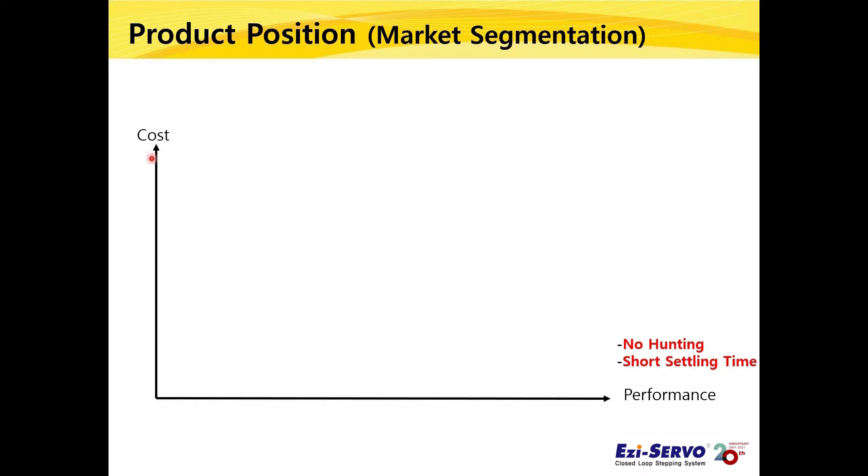This is the data only for the Korean market. The horizontal axis is performance, and the vertical axis is cost. Existing open-loop stepping motors were recognized as low cost and low performance, and the AC servo is a high-performance, high-cost motor. And the location of the closed-loop stepping motor was here.

It is a common perception of customers that it is better in performance than open-loop stepping motors and lower than AC servo motors. In this market, competitors' closed-loop stepping motors have dominated the Korean market for about 15 years at half the price of AC servos, with two advantages: no hunting, and shorter settling.

In addition to these two advantages, FASTECH moved the market from here to here with another advantage: high position accuracy, and achieved the number 1 market share in the Korean stepping motor market.

From now on, let's compare these three advantages: no hunting, short settling time, and positioning accuracy between Ezi-SERVO and AC servo with laser demonstration jigs.

The terms to compare are position accuracy and lost motion, related to position accuracy; comparison of settling time according to overshoot, related to short settling time; and robustness, related to no hunting.

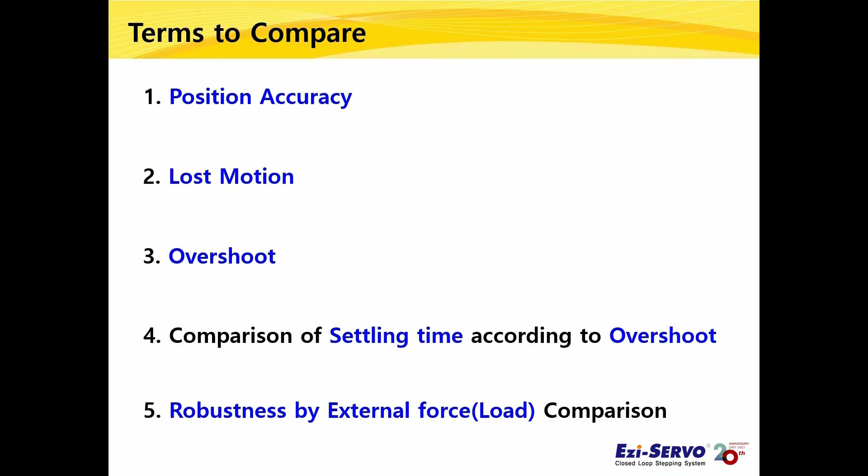We have prepared demonstration jigs to compare the two motors in these five aspects and see the difference in performance. First, let me explain the specifications of the demonstration.

As you can see, there is a demonstration in which you can visually observe the movement of the motor shaft by attaching a mirror to the motor shaft and reflecting the laser point on the screen.

The measurement conditions for both motors are the same. The size of the Ezi-SERVO motor is 42 mm, and the resolution of the installed encoder is 10,000 ppr. The capacity of the AC servo is 100 watt, and the resolution is also set to 10,000 ppr. The distance between the demonstration jig and the wall is 8.4 meters.

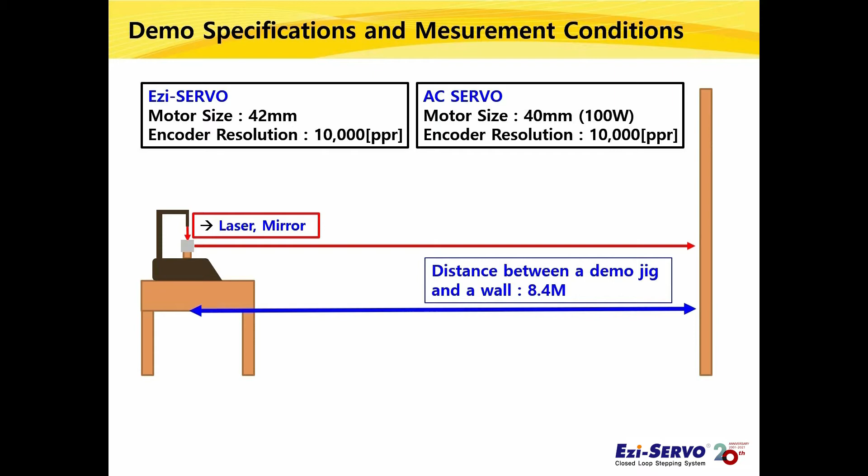First, let's compare the position accuracy of the two motors. As mentioned earlier, the measurement conditions for both motors are the same. Both motors were made to move at equal intervals by 0.36 degrees in only one direction. At this time, let's compare whether the actual position comes out the same.

As you can see, the AC servo has a constant moving distance at equal intervals, so it has high position accuracy without any position error. One thing to note is the Ezi-SERVO. Even though it is a stepping motor, you can see that it has the same high position accuracy as an AC servo.

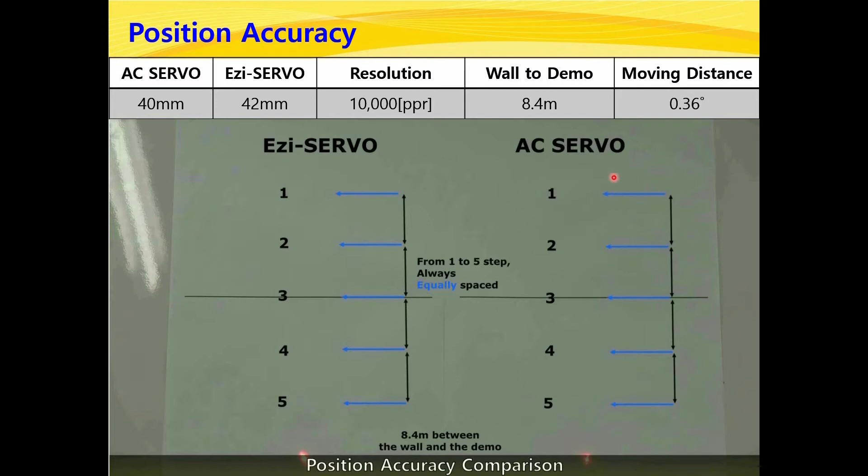Good position accuracy means that when it is moved in one direction, it does not show position error. Both AC servo and Ezi-SERVO show this. Next, let's compare the lost motion.

The measurement conditions were the same as before. The difference from position accuracy we saw earlier is that the motor rotates alternately in the CW and CCW directions by 360 degrees. That is, in the case of lost motion, the direction has to be changed.

As you can see, the AC servo rotates 360 degrees regardless of the direction, and it returns to the target position without any position error. Likewise, even if the direction of the Ezi-SERVO is changed, you can see that it returns to the target position without any position error. Lost motion refers to the position error that occurs when the direction changes.

In summary, position accuracy and lost motion are related only to the accuracy of the encoder. An Ezi-SERVO uses a high-precision encoder like AC servos, so it always checks the current actual position and corrects it so that there is no position error. Thus, Ezi-SERVO has high position accuracy and small lost motion.

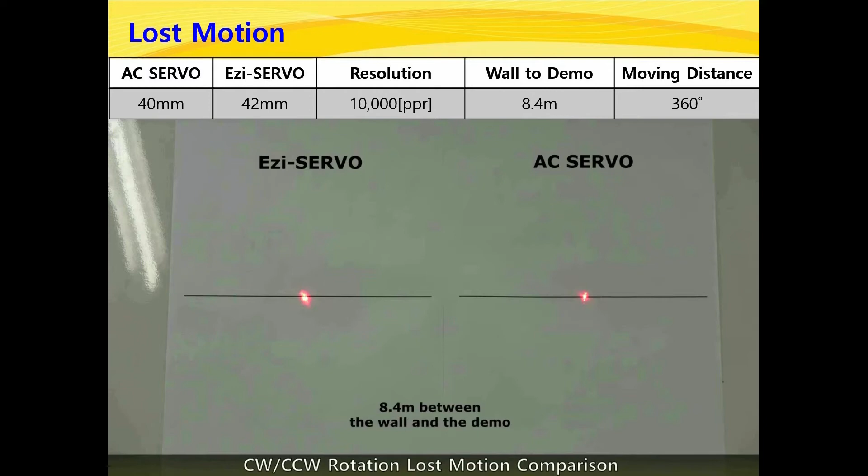Next, I will show you the overshoot. Overshoot means the value of how far the motor has exceeded the target position. The demonstration used the same setup as before. From now on, let's see how the overshoot differs when the motors are moved under these conditions.

As you can see, Ezi-SERVO has a small overshoot, but AC servo has a relatively large overshoot. Of course, the AC servo used in the demonstration is not optimal because it has been tuned with the auto-tuning function, and overshoot can be reduced if it goes through a precise tuning process. But even without such hassle, Ezi-SERVO can show its performance without overshoot.

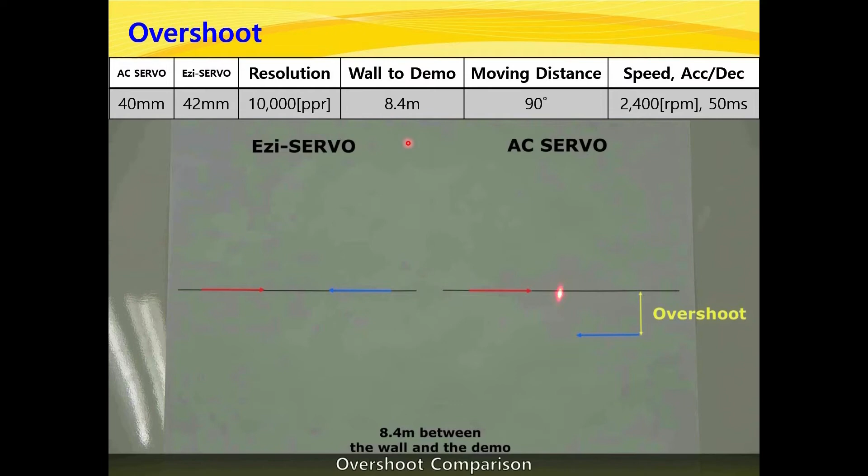This overshoot will affect the settling time. I will show the difference in settling time according to the overshoot in a video.

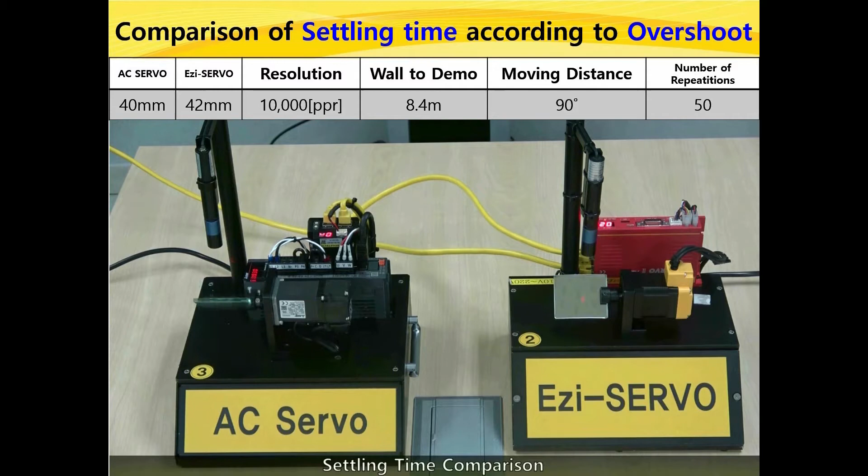We set the in-position value to 0, which is the condition that the next command is executed only when the commanded position is reached without an error of 1 pulse. The operation was repeated 50 times without waiting time between commands.

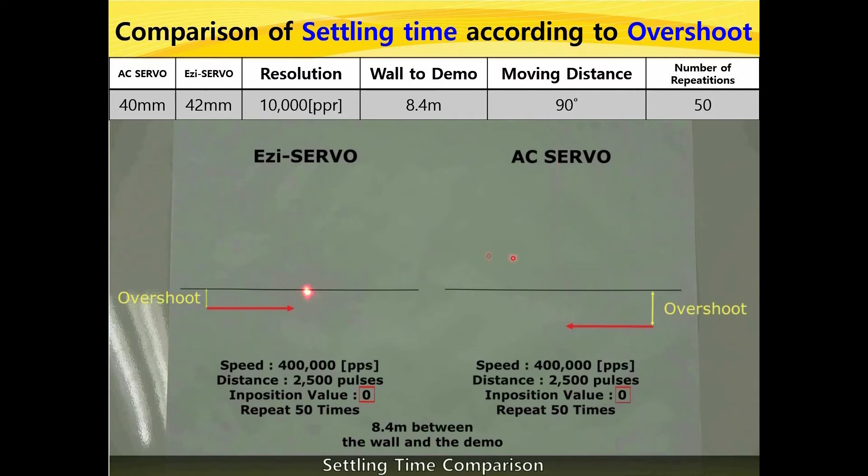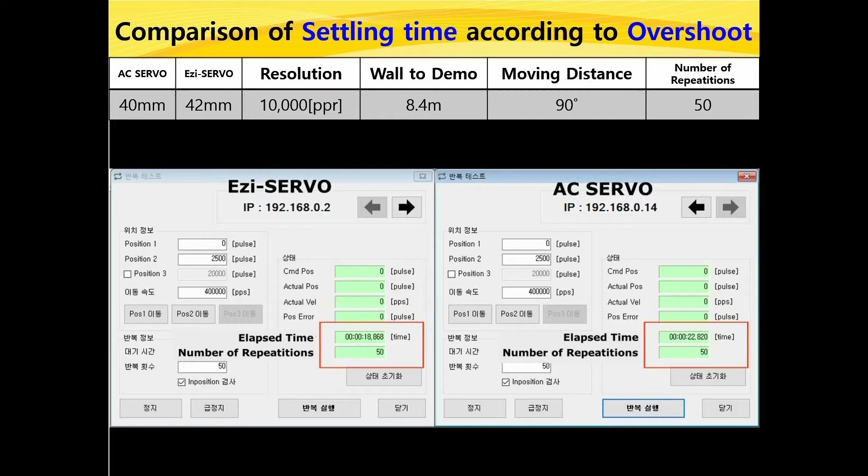As you can see, Ezi-SERVO with less overshoot completed 50 repetitions about 4 seconds before AC servo. If a larger overshoot occurs, more time is required to execute the next command. In other words, the takt time would increase. That is why short settling times are important.

Finally, let's compare robustness. Let me show you what happens when the same external force is applied to the mirror on both motors. Ezi-SERVO does not move much even when external force is applied, whereas AC servo shakes greatly, that is, hunting occurs.

This will be explained in more detail through a comparison of the torque characteristics of AC servo and Ezi-SERVO and a demonstration video later.

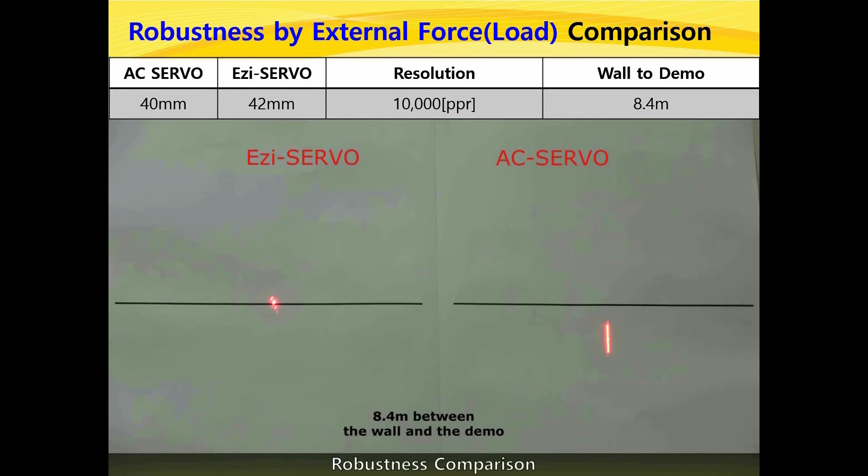Before that, I would like to ask you a question with a real machine as an example. This application is the XY theta vision alignment stage, one of the most common applications. Basically, alignment is a machine that allows the camera to accurately capture the object to be inspected by continuously moving a short distance.

In this machine, a 100-watt AC servo is mounted on the right, and an Ezi-SERVO of the same size is mounted on the left. Would AC servo be better for this application? Or would Ezi-SERVO be better?

Customers have taken it for granted to use AC servos in applications requiring high position accuracy. As mentioned earlier in the market segmentation, customers generally have a perception that AC servo performance is better than stepping motor. Of course, the correct answer is Ezi-SERVO. But the why is important. How can a stepping motor show better performance than an AC servo? We will explain it in the next chapter.

First, I will explain the difference between AC servo and stepping motor with torque comparison. Let's compare the torque of similar size AC servo motor and stepping motor. The graph shown above is the torque graph of a 200-watt AC servo motor, and the graph below is the torque graph of Ezi-SERVO of the same size as 56L.

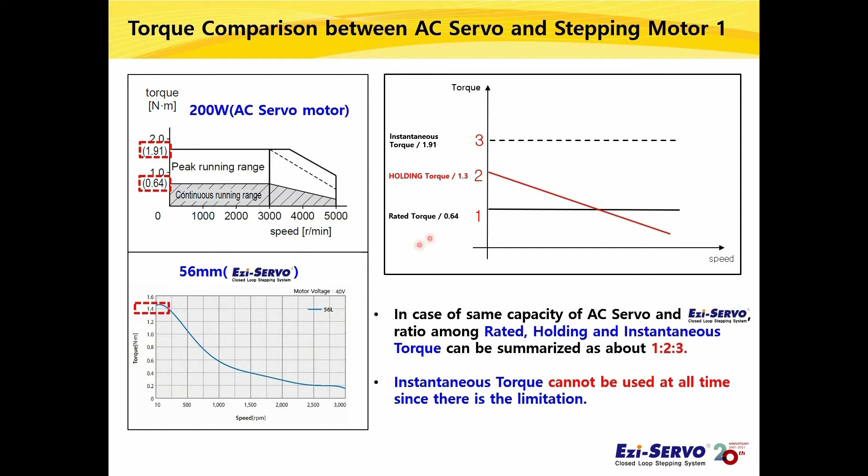Literally instantaneous, that is, it is this instantaneous torque that can be used only for a while during acceleration and deceleration. Also, even if an instantaneous torque of 3 can be used, when the speed is 0, that is, when it is at the target position, the stepping motor has a higher torque than the AC servo motor because of the holding torque of 2.

As previously explained, the instantaneous torque of 3 is not always used, but the torque of the AC servo motor is proportional to the position error. The smaller the position error, the smaller the torque, and the smallest torque at stop, that is, at the target position.

For example, as you saw in the robustness comparison video using the laser demonstration earlier, when a small mirror is attached to the motor shaft and touched by hand, the torque generated by the AC servo motor is very small because the positional error is small. Therefore, it is easy to rotate the mirror by hand at first, but as the mirror is rotated more and more, the positional error becomes larger and the AC servo supplies more current to the drive to reduce this position error. Thus, it becomes difficult to rotate the mirror.

In other words, the torque of the AC servo motor is not always an instantaneous torque of 3, but is proportional to the position error and produces the smallest torque when it is at the target position. So there is a high possibility of hunting after stopping.

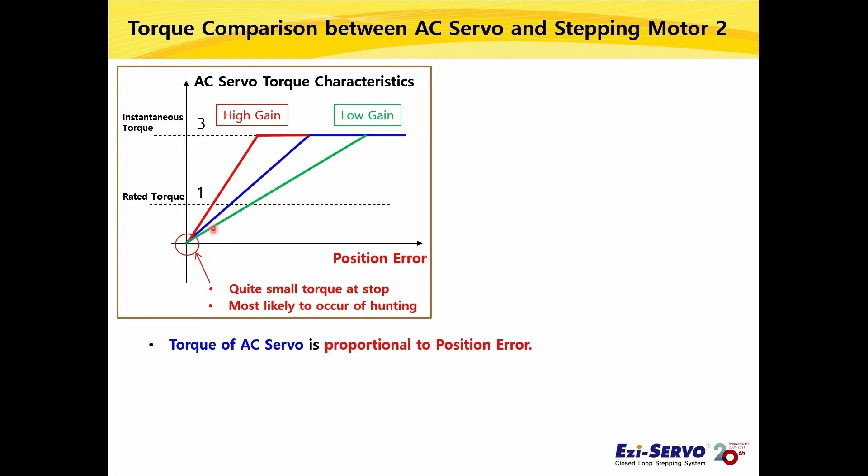Of course, if the gain is adjusted for the AC servo, the response improves. But when it is near the target position, the torque is the same regardless of the gain. On the other hand, since the torque of the stepping motor is not proportional to the position error, it is only related to the speed, and has a holding torque that produces the maximum torque when stopped. The possibility of hunting after stop is smaller than that of the AC servo motor.

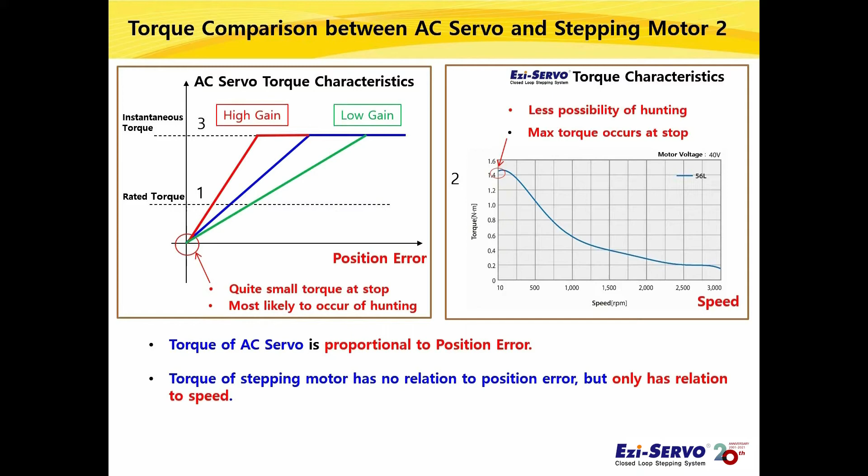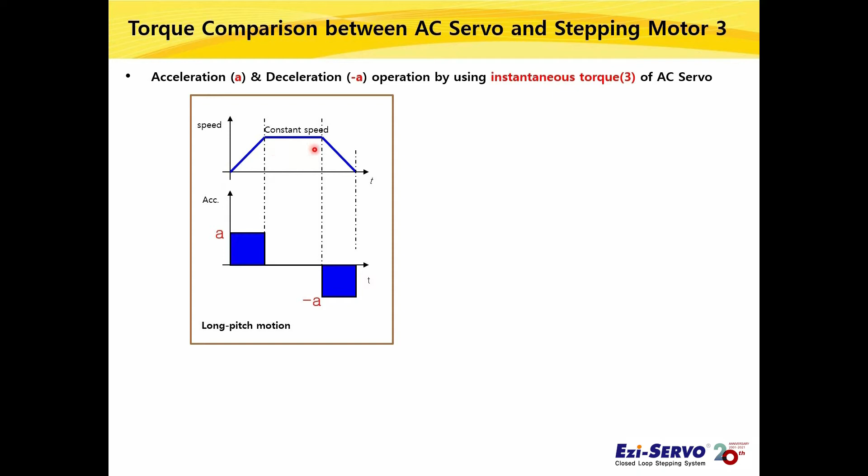Now let's divide the motion into two and compare it. One is a long pitch motion, in which there is a constant velocity section, and the other is a short pitch motion that decelerates immediately after acceleration.

Now, let's assume that a certain load is accelerated and decelerated by A, using the instantaneous torque of 3 of the AC servo motor. Assuming that F equals ma, m, the load, is a fixed value. First, in the case of a long pitch motion, acceleration is a when accelerating. Since there is no change in speed in the constant speed section, the acceleration of the load is 0. And the acceleration when decelerating is minus a. Therefore, the absolute value of acceleration-deceleration applied to the load, that is, the impulse, F, is a.

On the other hand, in the case of short pitch motion, this constant velocity section does not exist, and deceleration is performed immediately after acceleration. In other words, since acceleration and deceleration change continuously, the amount of impulse applied to the load is 2a.

To make it easier to understand, for example, if you use an instantaneous torque of 3 like an AC servo motor, you can understand that the shock transmitted to the vehicle body is doubled if you press the accelerator and brake continuously. Therefore, in short pitch motion, instantaneous torque of 3, that is, maximum torque of the AC servo motor, cannot be used. This is because if used, it is more likely to cause shock or vibration to the mechanical system, such as a car as an example.

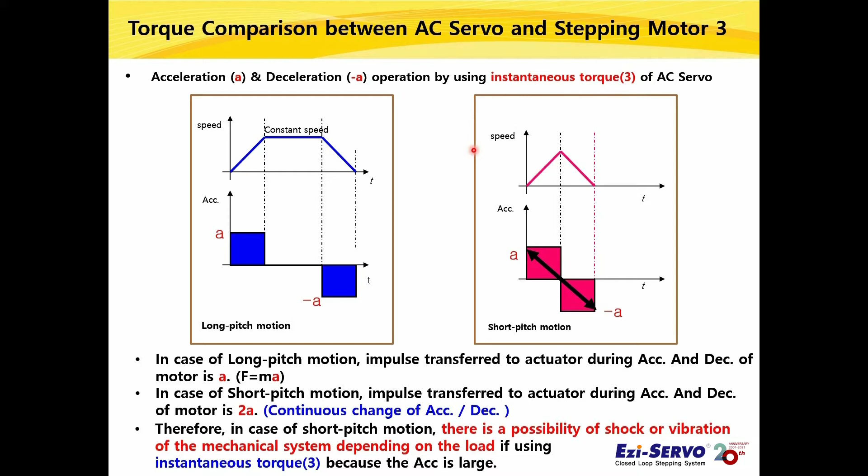Back to the beginning, I will ask again. In short pitch motion applications that move short distances at high speed, such as the XY-theta alignment stage, when it is stopped at the target position and shock or vibration comes from outside, which motor, AC servo or stepping motor, is likely to hunt?

It's an AC servo. As mentioned earlier, if you use the instantaneous torque of 3 of the AC servo, it can give a shock to the mechanical system when aligning. Also, when aligning, the distance is very short, so it is often difficult to use an instantaneous torque of 3.

First of all, as you saw in the video comparing the robustness of the laser demonstration, the AC servo generates the smallest torque when at the target position, that is, when the speed is 0, so there is a high possibility of hunting after stopping.

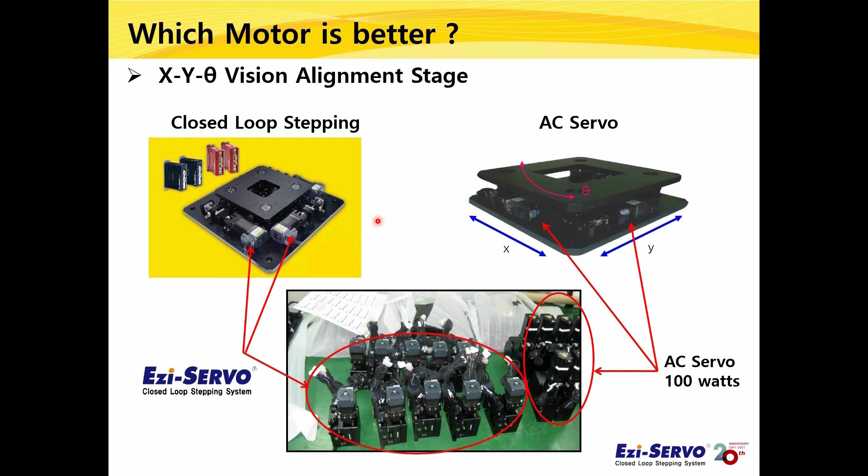However, in the case of a stepping motor, there is a holding torque that exerts the greatest torque at the target position, so when the alignment is over, it stops at the target position and holds the stage tightly with the holding torque. This is a demonstration of the difference between AC servo and Ezi-SERVO in high-speed short-pitch motion, described so far.

The same actuator with the belt structure is equipped with a 42 mm size Ezi-SERVO on the left, and a 100-watt class AC servo on the right. There are cameras on each side, and there is a piece of paper with a small word on it, as the camera moves by motor continuously over a short distance, capturing the written text. You can think of it as the same as a vision factor.

As you can see, the Ezi-SERVO has a high holding torque and less hunting when stopped, so the text is captured by the camera even in a short pitch motion.

Since the AC servo generates the minimum torque when stopped, hunting occurs, and you can see that AC servo cannot capture a text in a short pitch motion. However, the text is captured only when you move the beginning and end, that is, a long pitch.

To explain more about the belt pulley system, due to the mechanism structure, the belt pulley is a short pitch motion from the motor shaft perspective. For example, in the case of a ball screw, when the lead is 10 mm, the motor moves only 10 mm in one turn, but in the case of the belt pulley, when the radius is 10 mm, when the motor turns once, the belt moves 62.8 mm as you can see.

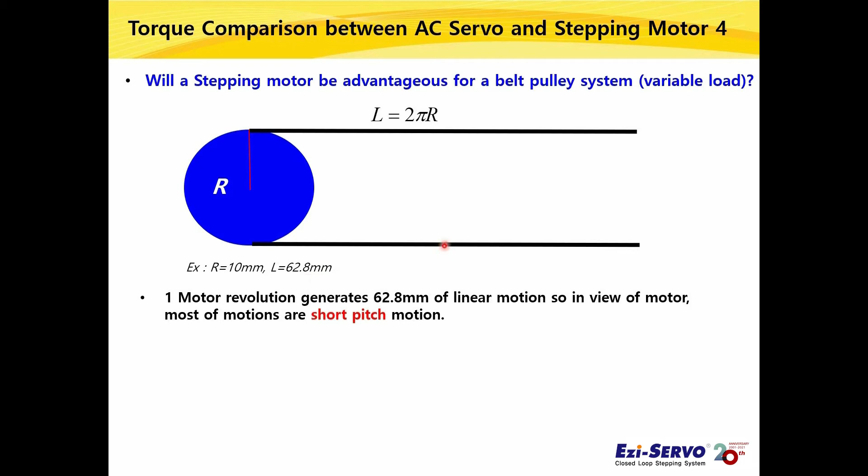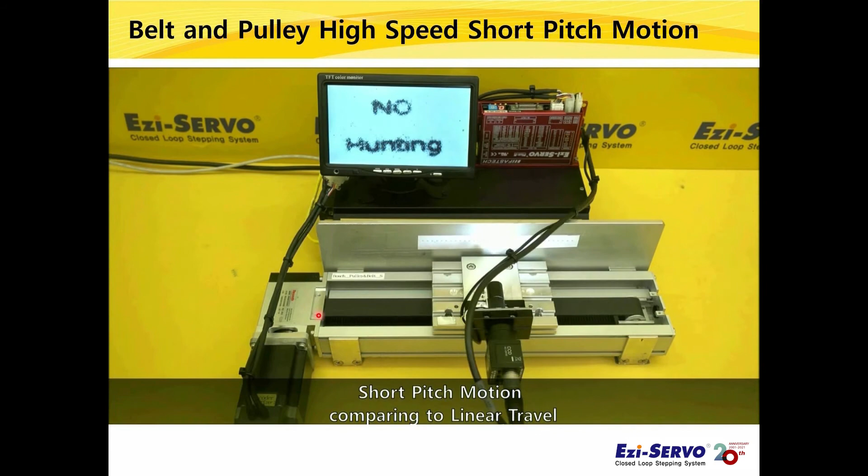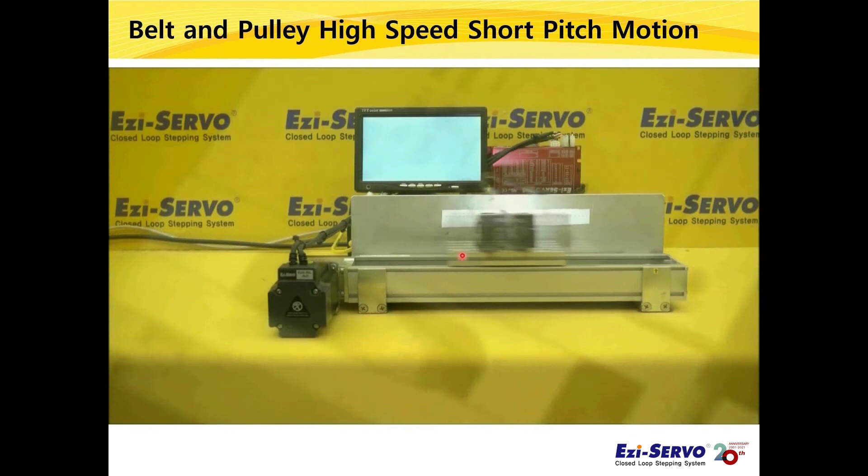I will show you a demonstration of the belt pulley in action. If you look at this part, you can see the short pitch motion of the motor in the belt pulley demonstration. You can see that the word 'no hunting' is accurately captured without hunting even in a short pitch motion.

In summary, in the case of an AC servo, the position error decreases when decelerating from the target position, and the motor torque decreases when the position error decreases. Near the target position, the torque generated by the AC servo is very small, and the belt is of low rigidity, so when the belt is shaking, the force is transmitted directly to the motor shaft, so it continuously affects the shaft.

On the other hand, in the case of a stepping motor, as the speed decreases, the stepping motor increases the torque and produces a maximum torque near the speed zero, near the target position. So, in the case of AC servo, since the torque is small near the target position, it is difficult to stop without hunting because the vibration caused by the tension of the belt is directly transmitted to the motor shaft.

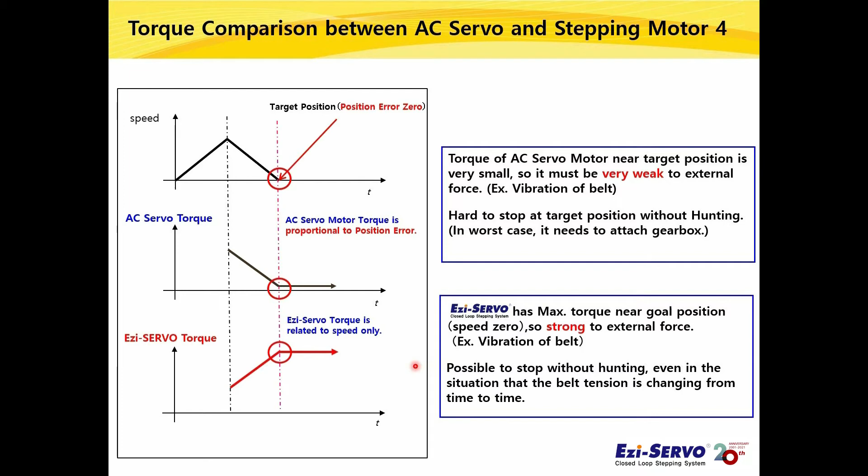The stepping motor can overcome the vibration and stop without hunting without a gearbox, because the torque generated by the stepping motor at that time is relatively larger than that of the AC servo, even when the vibration caused by the belt tension is transmitted.

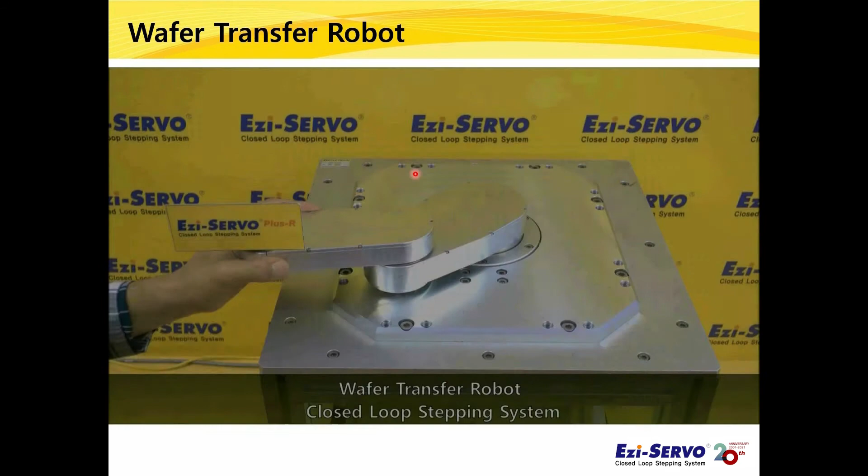I'll use a video of the wafer transfer robot as an example. As you can see, the WTR has a belt pulley structure inside. In the case of belt drive, the moving distance is long, so many people think that it is a long pitch motion that moves a large distance from a motor standpoint.

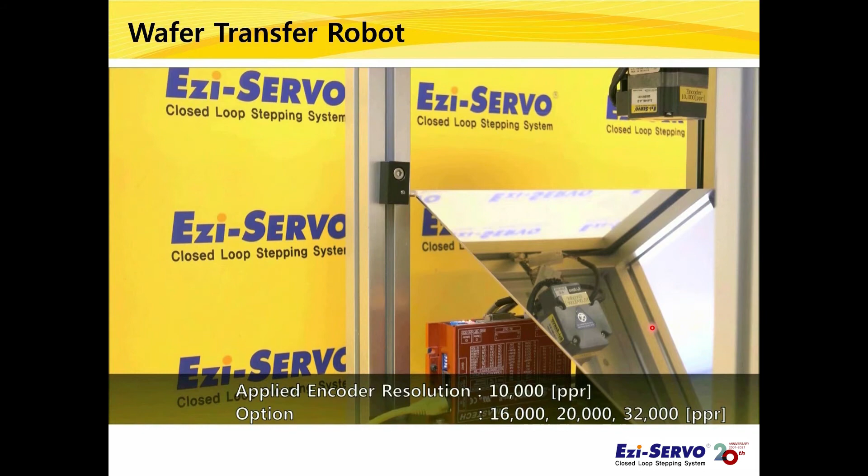However, from the motor standpoint, it is a short pitch motion due to its mechanical structure. As you can see, the distance the object moves seems to be long, but the motor does not turn even a single turn. This is an example showing that a stepping motor can be applied to such a WTR.

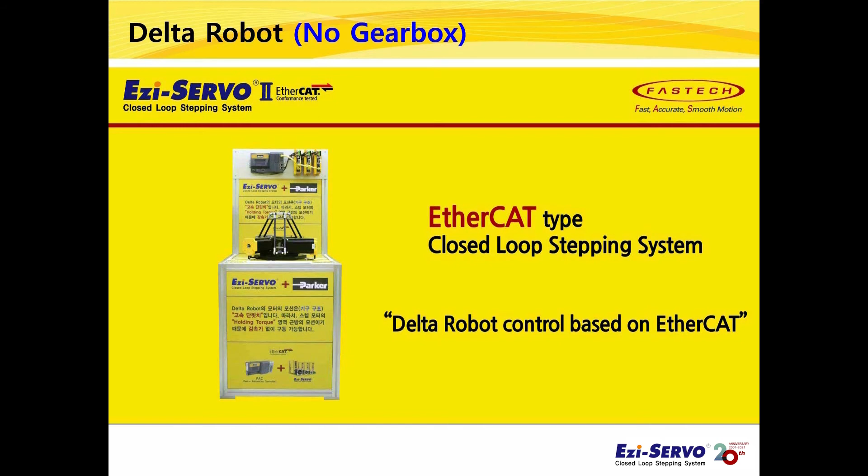The next video is about delta robot. In general, AC servo motors are used a lot for delta robots. However, when an AC servo motor is used, the torque at stop is small, so most of the motors are driven by installing a gearbox.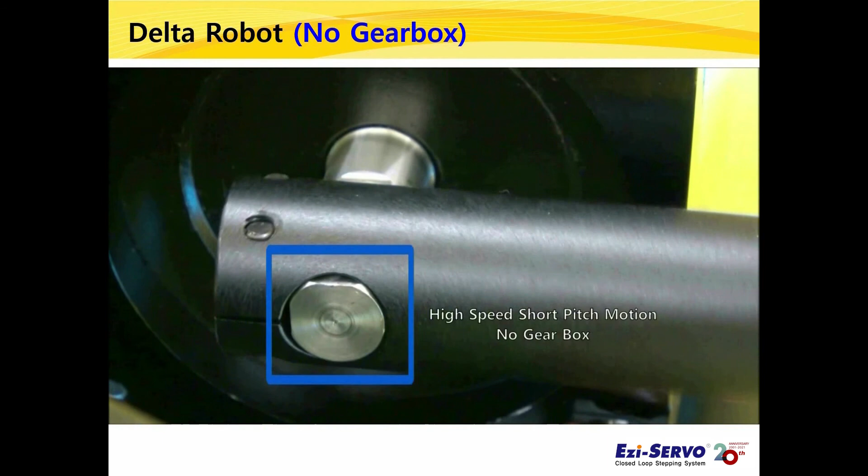In the case of stepping motors, the robot can be connected directly to the motor shaft without a gearbox because it generates the maximum force when stopped. If you look at the actual motor drive, it is a short pitch motion. It is a good example that a stepping motor can be applied because it repeats stopping and driving.

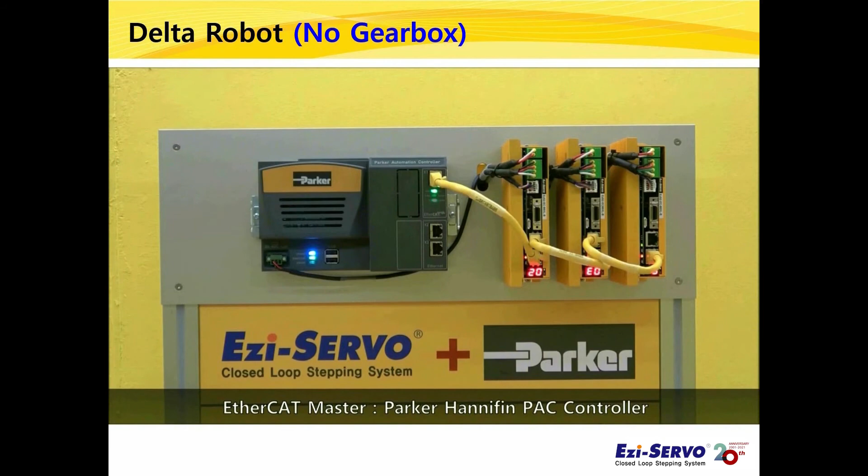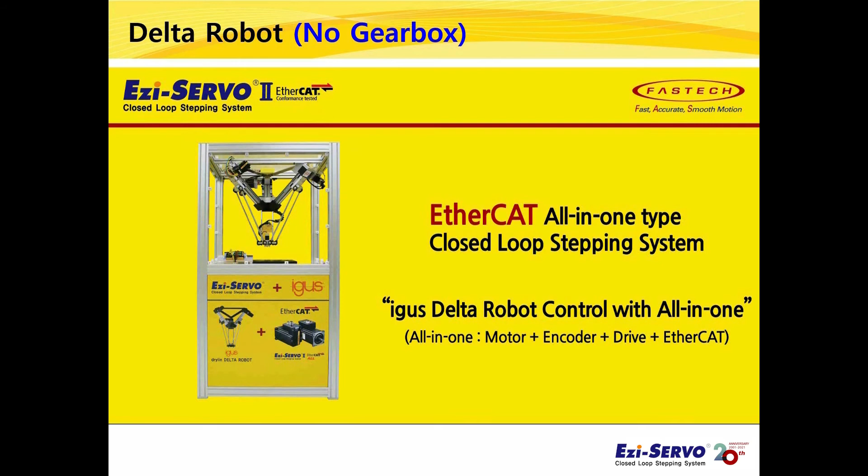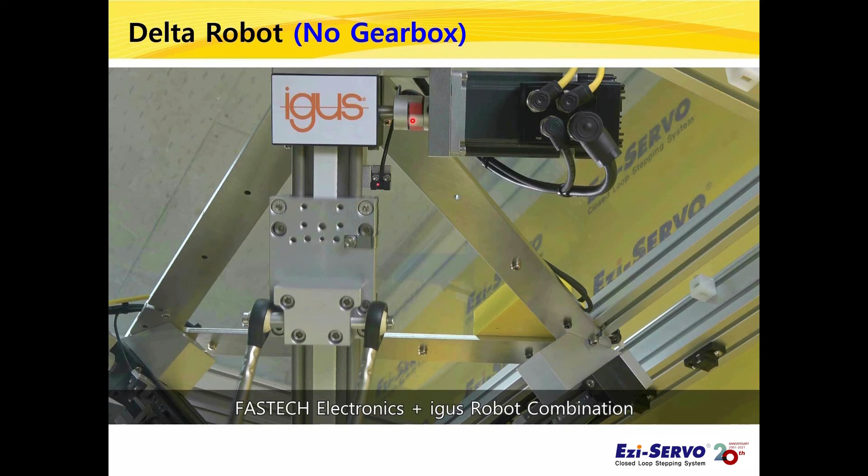This is a demonstration of a Delta robot from igus, Germany. This Delta robot has a belt pulley structure and is a short pitch motion from the perspective of the motor shaft due to its structure. You can see that the motor does not rotate 180 degrees. The stepping motor does not need a gearbox because it operates in a low speed range with short pitch motion. If you use an AC servo here, you may need to attach a gearbox when stopping.

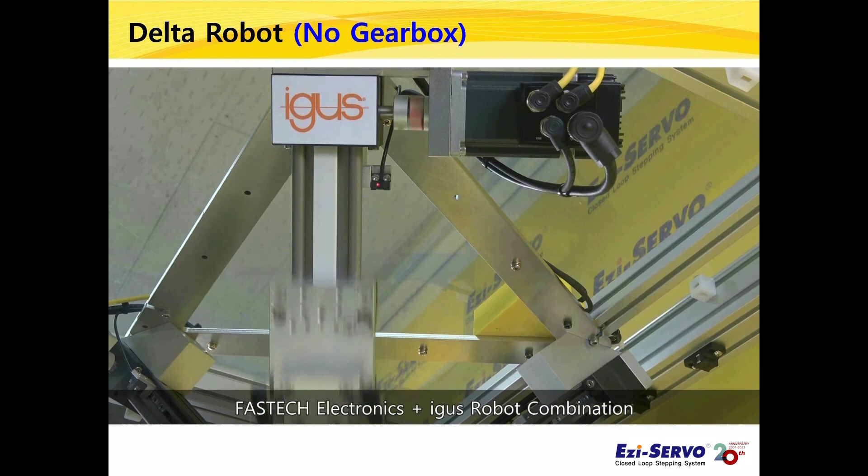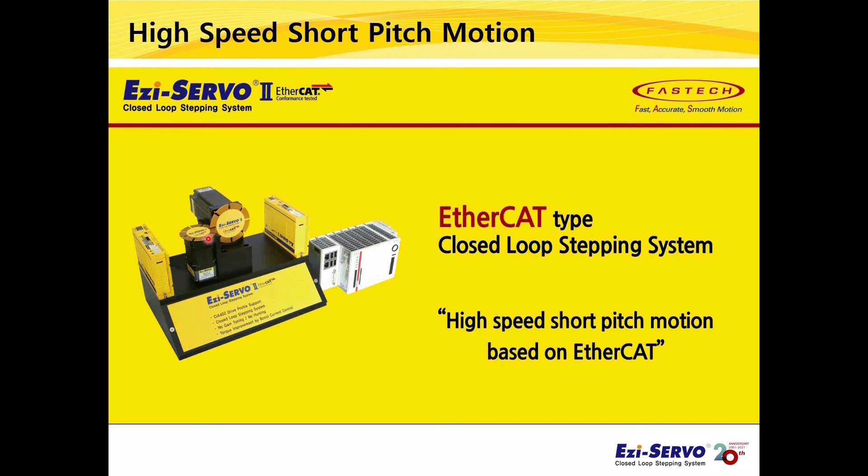The following is a demonstration showing a high-speed short-pitch motion using two motors. A disc with 8 small grooves was attached to the two motor shafts, and the grooves were vertically engaged. You can see the grooves interlock without collision while the two motors alternately drive in high-speed short-pitch motion. This operation is possible because of the precise position control through the high-resolution encoder of the Ezi-SERVO and the characteristics of the stepping motor without hunting after stopping.

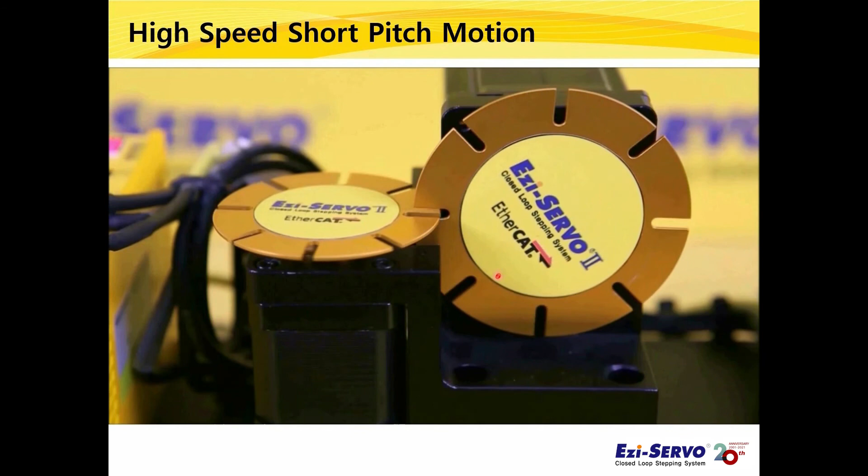Let's summarize what we have looked at so far. FASTECH Ezi-SERVO has 3 advantages by adding high positioning accuracy to the two factors that allow it to reduce the settling time. Due to the high holding torque characteristic of the stepping motor, there is no tremor or hunting after stopping, and there is less overshoot than the AC servo.

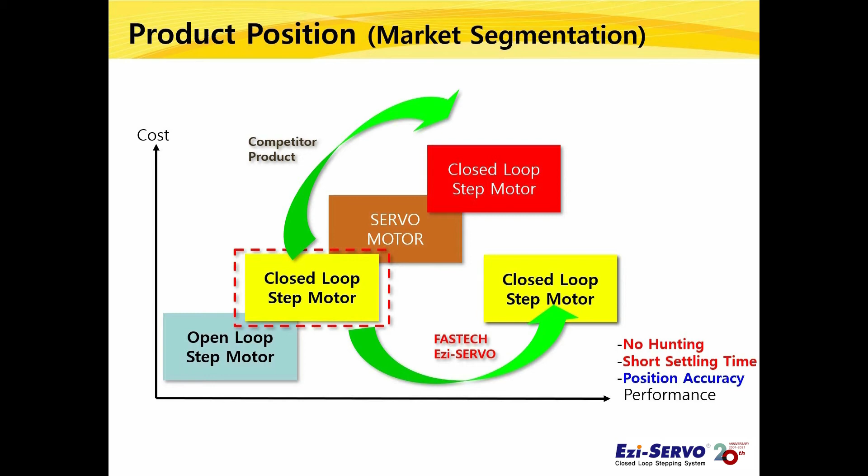In the Korean market, it was possible for FASTECH to move the closed-loop stepping motor market from here to here. It also replaced the AC servo market, especially 100-watt and 200-watt class AC servos. It wasn't easy, because customers' perception of AC servos and stepping motors was so strong. However, after the customer felt or actually experienced the advantage of Ezi-SERVO, it was possible to replace it, and now many customers use Ezi-SERVO.

From now on, I will introduce the actual application example of Ezi-SERVO.

Prior to introducing application examples, the main factors that could be applied to Ezi-SERVO are as follows: position accuracy, lost motion, overshoot and robustness. High position accuracy, low lost motion, small overshoot and robustness, as in stopping at the target position without hunting after stopping. Based on these 4 factors, I will introduce how Ezi-SERVO could be applied to each application by replacing AC servo.

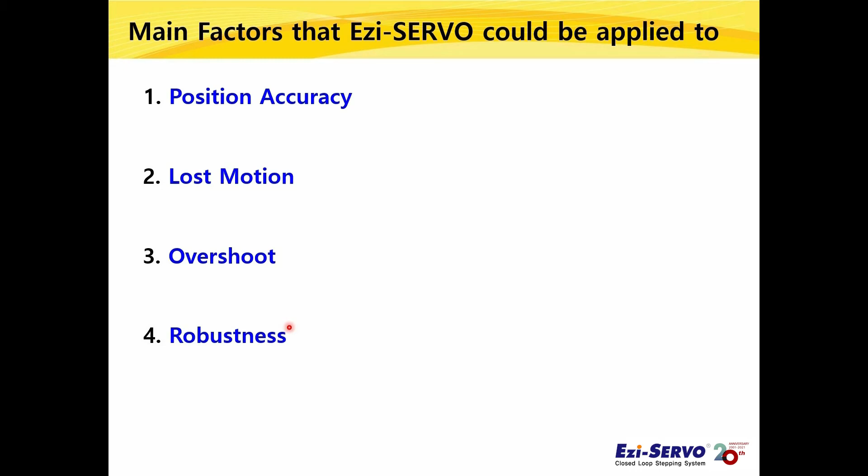The following is the LC dispensing machine. LC means liquid crystal. Two glasses are needed to make LCD panels used for TVs and monitors: the TFT panel on the left, and the color filter on the right. A certain amount of liquid crystal is dropped on the TFT panel as shown in the picture.

Glue is applied to the color filter as shown in the picture. Then, the part where the liquid crystal is dropped on this panel is bonded to the color filter on the right. When bonded together, this is the TFT part, this is the color filter part, this is the glue, and this red part is the liquid crystal.

When it is bonded, this liquid crystal spreads quickly. For example, when you press the panel with your hand on the TV, that is, when you press the liquid crystal, the pressed part changes color. The reason the color changes is that the liquid crystal is liquid, so when pressed, it escapes to the other side and the amount of liquid crystal changes in the pressed part, causing the color to change. For this liquid crystal volume to be constant, the drop must be constant.

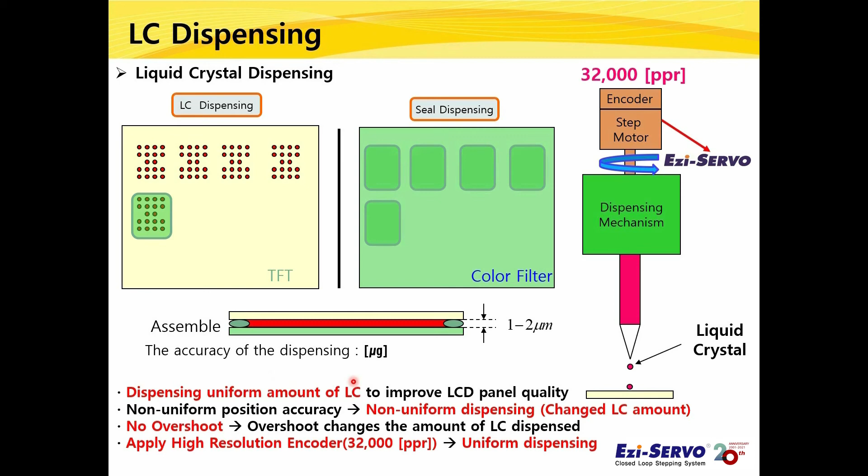But because of the customer's general perception that a stepping motor could not be used where an AC servo was needed, it took a year to suggest and conduct a test for replacing the AC servo with Ezi-SERVO. This is the actual liquid crystal dispensing machine. It took a year to get the opportunity to test the Ezi-SERVO, but after the engineers actually tested it, the AC servo on the entire machine could be replaced with Ezi-SERVO at once.

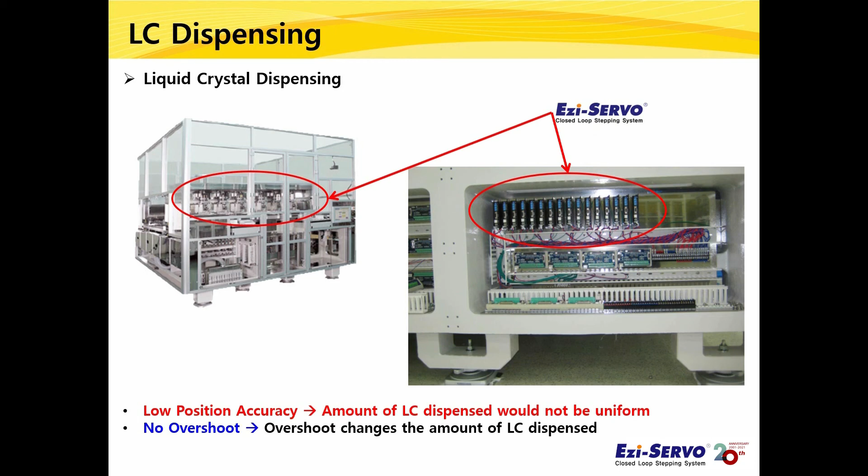I explained earlier that the glue must be applied to the color filter regularly. In this case, it is necessary to use a laser sensor to control the gap between the panel and the dispensing nozzle to be constant. This machine shown in the picture controls the gap between the nozzle and the panel through a laser sensor.

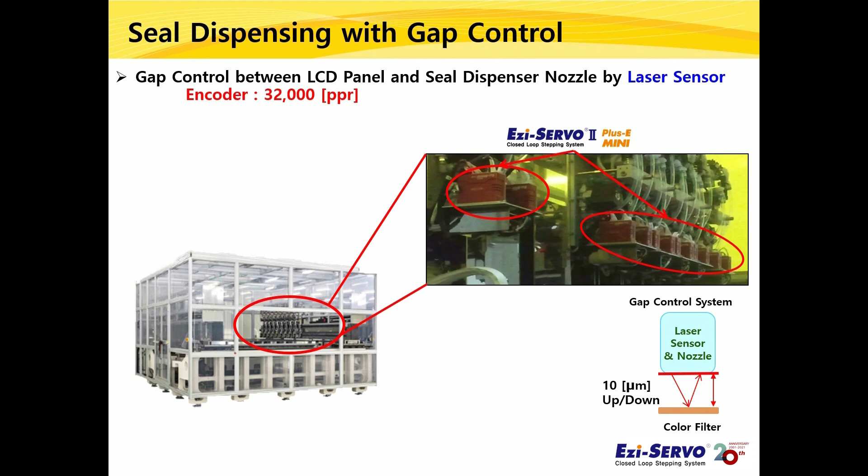In order to dispense a certain amount, the distance between the color filter and the nozzle must always be constant. In other words, gap control to keep the distance between the nozzle and the panel constant is necessary, so an expensive laser sensor is applied to this part. The color filter looks flat on the surface, but is curved. The nozzle must maintain the height against the bent color filter, and apply the glue following the gap.

That gap is 50 microns. For example, if the distance between the nozzle and the panel is 100 microns apart, you have to move 50 microns at a time.

If this spacing is not constant, such as 50 microns, if the distance is far apart, the glue will be less applied, or it will be more applied if applied closer. This means that the distance between the nozzle and the panel is always constant in order to apply this glue evenly.

For example, if your goal is to keep a gap of 50 microns, if the nozzle is 60 microns away, you'll have to order 10 microns down. When commanded like this, the Ezi-SERVO goes exactly 10 microns. Also, if you are 40 microns apart, you need to change the direction of the motor because you have to go up 10 microns. Even at this time, the Ezi-SERVO moves up to exactly 10 microns.

In the case of AC servos, position accuracy and lost motion are good, but the possibility of overshoot is high. So if an overshoot occurs and the motor moves too much, the glue may not be applied evenly. There is even a risk of damaging expensive panels by contacting the nozzles and panels.

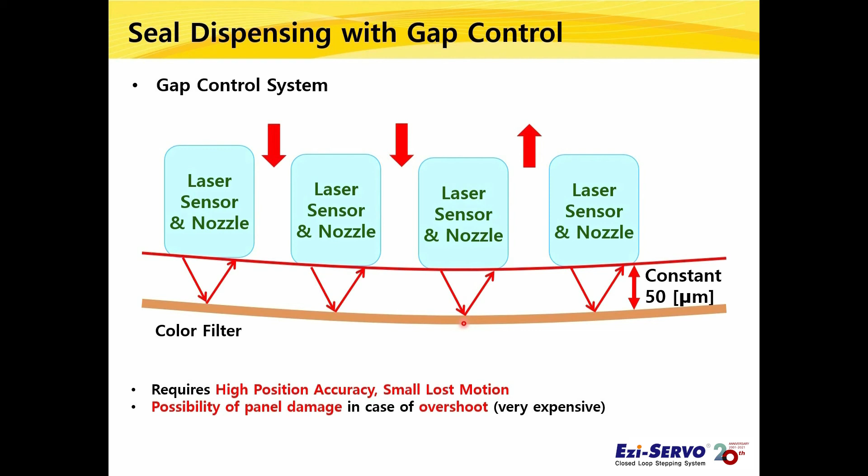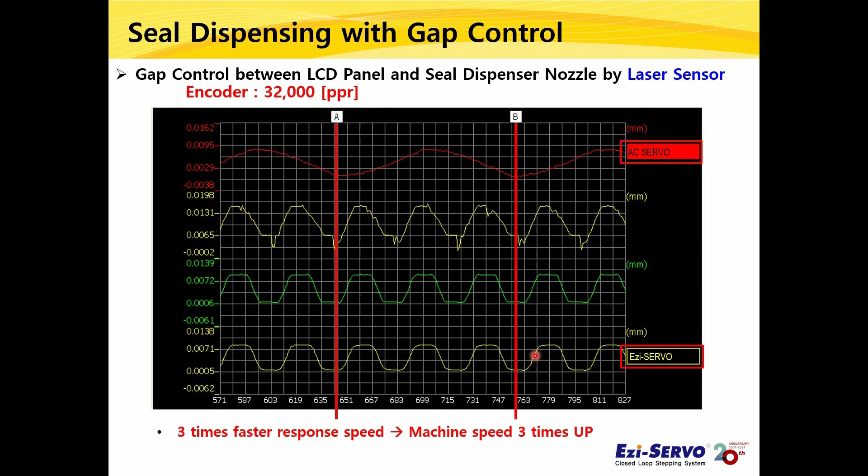For example, if the speed at which the glue is dispensed is 100 mm per second, it will move 100 mm for 1 second. And if you use an AC servo, the gap control, that is, up and down, is done 3 times, so the point to be corrected will be once every 33.3 mm.

However, since Ezi-SERVO does this up-down motion 9 times at the same time, it will add 3 times even between 33.3 mm. If the AC servo is used even within the same 100 mm, due to the response which eliminates the overshoot, the late response will be calibrated sparsely as before.

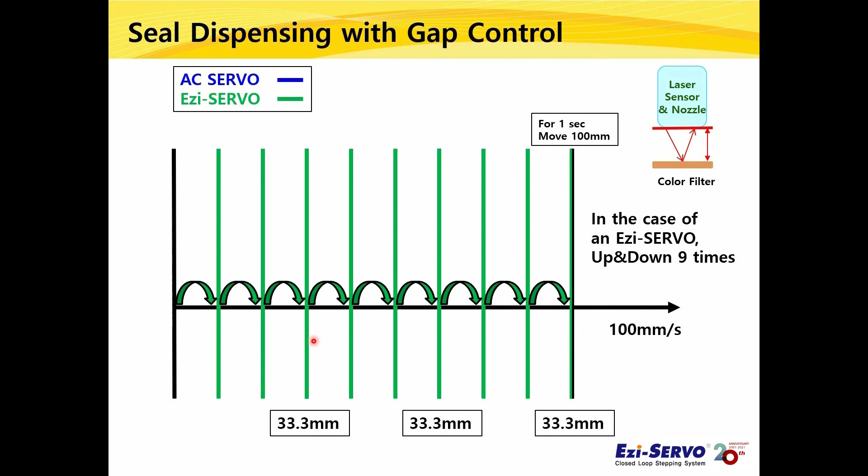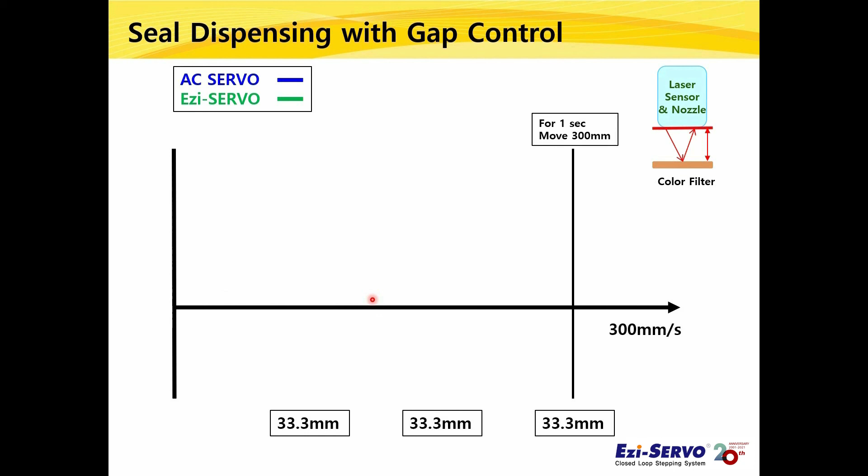If there is another bent point of the glass in between, the response will be slower to compensate for the gap. So, what's happening if you increase the speed to 300 mm per second, that is, triple the dispensing speed?

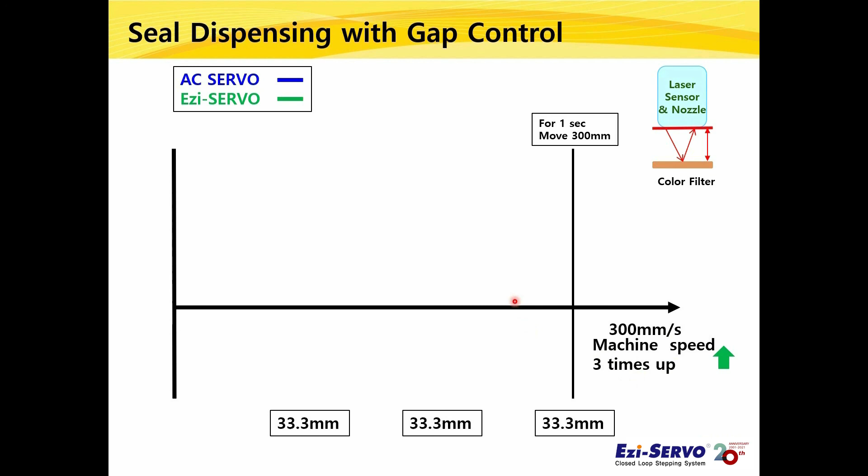Because Ezi-SERVO does up and down 9 times, as a result, it will correct the position the same as the AC servo did 3 times. This means that the machine speed is tripled.

In other words, by changing one motor, it has tripled the speed of the machine, increasing actual machine productivity by 3 times. In other words, there are many machines where Ezi-SERVO can perform higher than AC servo if the motor is well selected according to the machine.

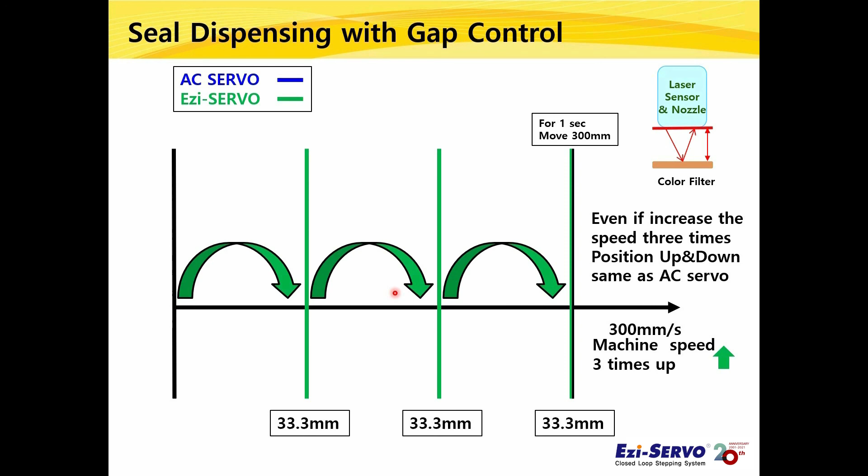I will introduce a small actuator as the next application example. In the case of small actuators, there are many high-speed short-pitch motions that move short distances at high speed, which is the advantage of stepping motors. And it is sufficient to apply Ezi-SERVOs instead of AC servos, so it is an effective market for cost-effectiveness.

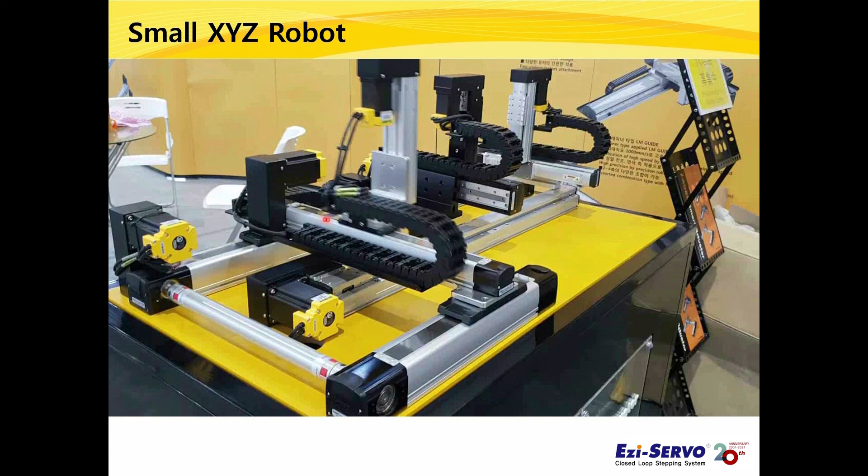As previously shown, in the case of a small actuator, all the torque of the AC servo cannot be used because the moving distance is short. And it is an application that can take advantage of a stepping motor with no hunting characteristics at the target position. Therefore, in the past, mostly AC servos were used, but many customers who know the advantages of stepping motors now use Ezi-SERVO.